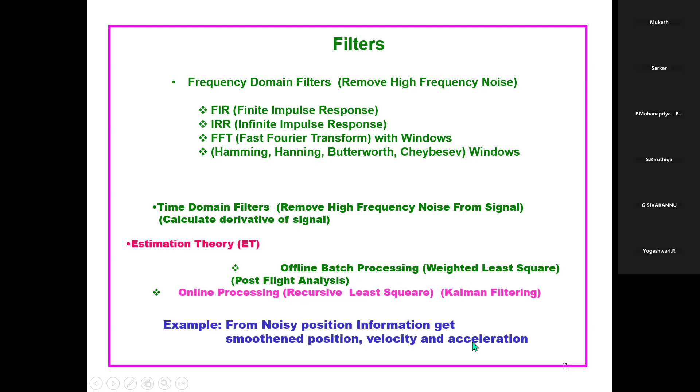And in a physical problem, you cannot avoid differentiation. Why? From the position you differentiate to go to velocity, and from velocity you differentiate to go to acceleration. You have to do it because these are kinematics, and in any missile case, when it is going to hit the target, some guidance law needs position and velocity. And integration is the opposite process. If you keep on integrating, this noise will not be there. But the initial condition of the integration is very difficult to know, so that itself creates a bias. So both ways you are having a problem.

Today I can tell you one thing: if the signal did not have any noise, control and guidance engineers, particularly signal processing people, would have been jobless, and this technique would have never come. So differentiation in the presence of noise is very terrible.

And from noisy position, how to get the velocity? This is called the estimation problem. The signal is there with the noise, and from there you calculate the derivative or second derivative. And for derivative information, you don't need anything more than acceleration. That is done by using so-called Kalman filtering with a recursive least square. So I think I have given the importance of Kalman filtering and where it is used.

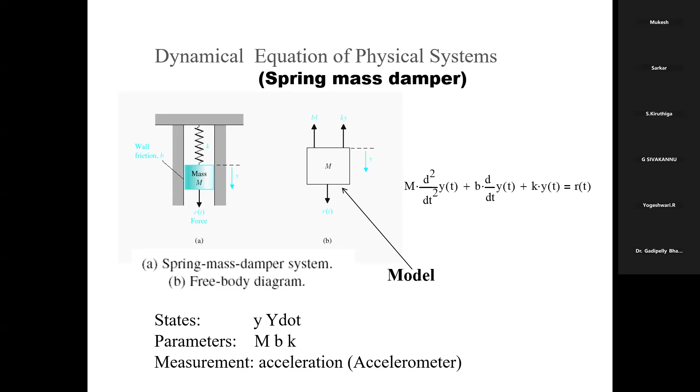And I think within my knowledge I have clearly told you. Now anybody having any question can ask me either now or later. Choice is yours.

So no way can you replace Kalman filtering as long as you are going to get the derivative of that signal. And the derivative of the signal is very important. Based on that, in kinematics, we generate the guidance command, and that guidance command is followed by the autopilot or controller.

So, I am going to talk about the history of estimation theory. These are all available in one book, Mohinder Grewal's book called Kalman Filtering. All the things are available there. I have shared that book with Mukesh. You can always take it and enrich your knowledge.

The first application of estimation theory was to track the planet Ceres, by Piazzi, an Italian astronomer, which he missed in January, and after observing continuously for 41 days in 1802, he could track back the planet based on estimation by Gauss. He is the greatest contributor in this estimation theory, and today everything you think of depends on the least squares technique he developed. Today, whatever we call optimal control, neural network.

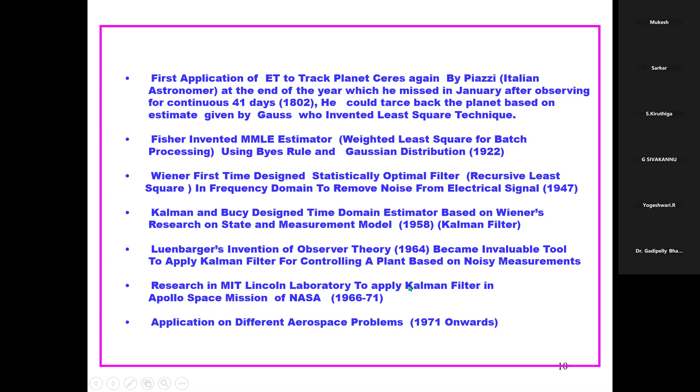So researchers in the MIT Lincoln Laboratory applied Kalman filtering in the guidance loop of the Apollo space mission, 66 to 71. It was successful. After that, computers also became more popular, from the time Charles Babbage invented the computer, and from 1971 onward the IBM 370 and all those things became available, and people started applying it in computers, and Kalman filtering has been a workhorse since then to today.

And application of the Kalman filter in the missile system: estimation of the sensor bias. That means in a sensor there will always be some initial bias. It's a physical problem. Nobody can help it. You have to bear with it. And trajectory from the EOTS and radar data, because when you do the integration, initially there will be some initial value. That is random, so no way you can find it out. And aerodynamic coefficients from the flight data. So these are all offline applications.

For that, people have used the extended Kalman filter for the forward pass, and then the Bryson-Frazier smoother offline in the reverse pass, and it is a recursive data processing algorithm and least square. I am not going to talk about the offline application, that is a different subject altogether.

So I am going to talk about the online only, because online is much more difficult, and offline, once you put this smoother, then it becomes very good. So now, I am just giving a little bit of implication. How come it becomes so important?

If you design a missile configuration, simulation study, then flight test, based on the flight data analysis you try to get the aero coefficients estimated, and that becomes very important for the control design. That becomes input to the control design, and control gains and all these things are re-evaluated and tuned to the actual system in the subsequent iteration.

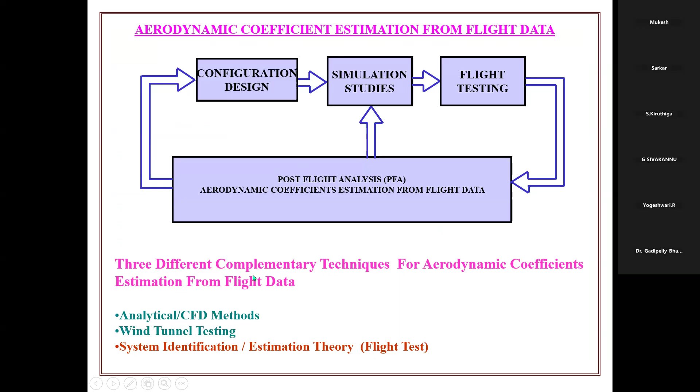So from the flight test, you get the aero coefficients; analytical and wind tunnel are also available. So this gives a third one, a complementary technique by which you try to correct the aerodynamic database after the first missile flight.

Then online applications: I am talking about the forward pass of Kalman filtering only. The radar is there. From there you try to estimate the states, meaning position, velocity, acceleration, and you uplink it to the missile onboard computer, and based on that they do the guidance calculation. Guidance means it will try to evaluate which path it will go, and after that the signal is taken by the control, and control tries to follow that path. Basically it is a tracking problem or regulator problem.

So state estimation from the sonar data for underwater application. Sonar is nothing but equivalent to seeker or radar for underwater application. And one more thing is there in the missile system, that is called seeker. Radar gives the position of the target and seeker gives the relative position of the missile and target. So if the radar is kept on the ground, the radar has to give the uplink command to the missile.

And if it is seeker, it is totally autonomous, and you don't need any third party like radar from Earth to give it through the uplink. This fellow will be in the autonomous mode, and it will directly hit the target. So that's why seeker has become very popular, and of course, seeker is very costly also.

So thinking about cost effectiveness, the Air Force or our users always prefer this: for some time you use radar, but when the missile comes close to the target, you switch over to seeker so that it will be in the autonomous mode and it will hit the target. This is in the guidance application.

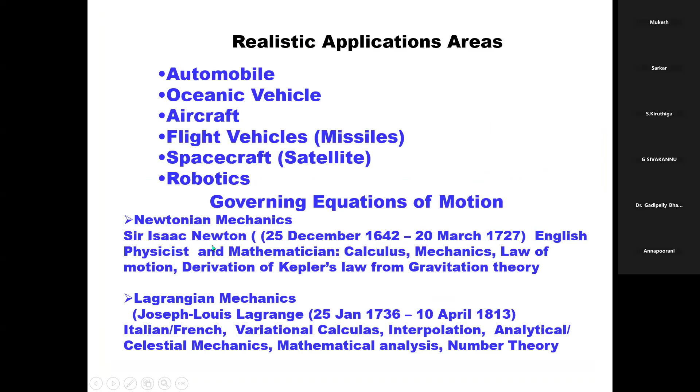Pioneering contribution in estimation theory. What are the areas? Automobile, oceanic vehicle, aircraft, missile, satellite, and of course robotics, and chemical engineering plants also, and governing equations of motion, Newtonian mechanics and Lagrangian mechanics. Okay, who are the great contributors on this? Friedrich Gauss, least squares, recursive least squares.

Then Norbert Wiener, MIT professor, invented the Wiener filter. That is in the frequency domain. Then Kalman, 1930 to 2016, applied it in the time domain with the state space method, and he is the third contributor. And of course, other contributors are there. Their impact is not so much, so nobody can replace the Kalman filter today.

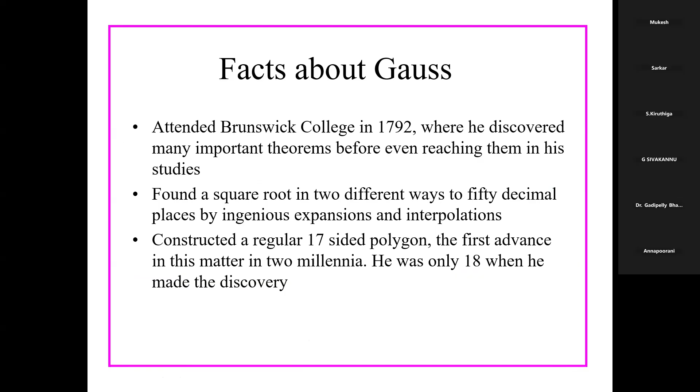He was only 18 when he constructed a regular 17-sided polygon, the first advance in the matter in 2 millennia. Gauss was a mathematical genius. His importance was in number theory, algebra, analysis, geometry, probability, and theory of errors. And he worked on astronomy, celestial mechanics, surveying, geodesy. The areas covered range from astronomy to civil engineering, electromagnetism, mechanics, optics, and actuarial science.

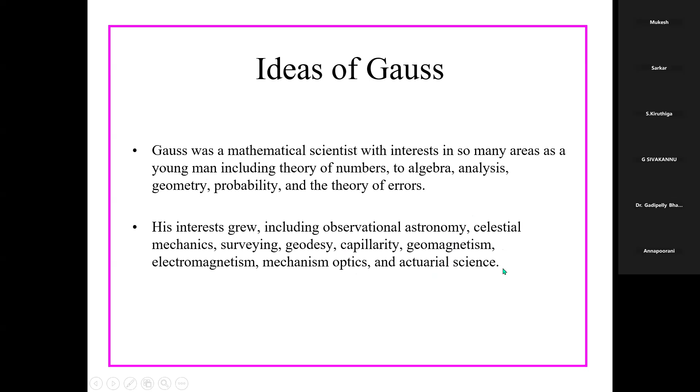And he was a very introverted person, never used to talk to anybody. And Adrien-Marie Legendre in 1805 published a paper on least squares, but he did not give any proof. Gauss gave a formal proof, and I think we all know how least squares is done. We all study it in mathematics. So Gauss basically introduced that.

And these are all in the state space method. And I am going to give a proper definition of estimation theory, what basically it does. I have taken this from the slides of Professor Ghosh of IIT Kanpur. You are having a dynamical system, x dot is equal to f of x, u, theta. Standard equations I'm taking. It will be having the input, and output will be there.

In a control problem, what happens? You give the input and try to get the output and see how the output meets the requirement of the demanded output, whatever error will be there, with a minimum tracking error. But this estimation is something different. Input is there, and output also is there as a measurement. But from there, you have to calculate the state variables and parameters. So it is a totally inverse problem.

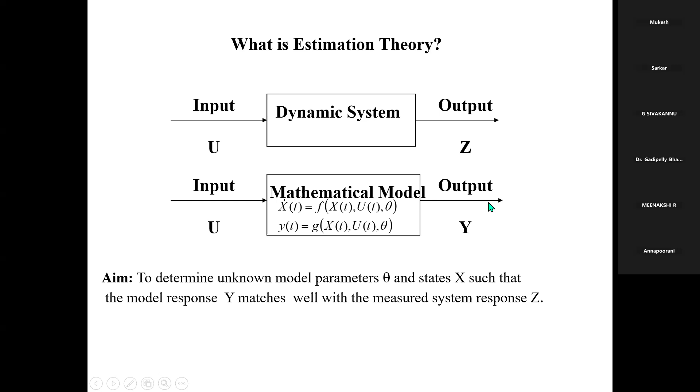So that output y actually matches with the measurement of the system, going in the mean path through the noise. Those plots I'll show you later. So input is there, state equations are there, there will be some process noise. Then measurement will be there, the sensor senses it, a sensor model will be there, and noise also will be there. In the sensor model there will be some noise, and output will be there. So in the input some noise is there, and in the output also some noise is there.

What is the noise in the input? I'll give a very good example. When you are flying in an aircraft, during the cruise time, what happens? You must have seen so many times that it goes into turbulence, and some buffeting takes place, and you get a jerk. That is nothing but an input. It comes as an input, and in no mathematical sense will you be in a position to model it exactly. There will be some approximation.

So in the plant also, there will be some approximation. So some noise will be there in the input, something in the plant, and something in the measurement also. So in three places noise will be there, and the mathematical model cannot represent the realistic phenomena. As a result, some amount of noise and some imperfection will be there. That imperfection you have to compensate. That is called the process noise. I will come to that later. That is the crux of Kalman filtering.

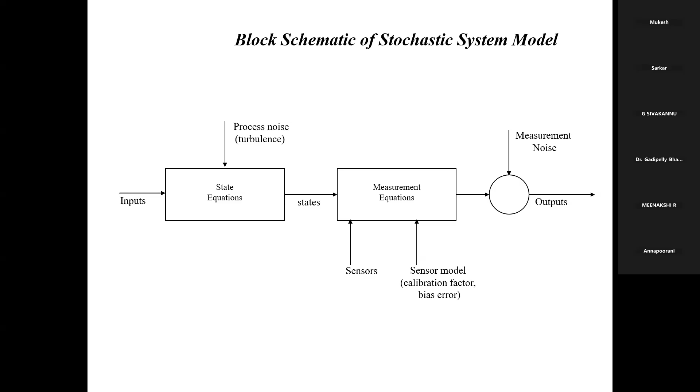It is equivalent to gain scheduling, whatever you do in control. Actually, Kalman filtering and control have very much similarity. There you do the gain tuning, here also you have to do it. But in Kalman filtering, the plant is basically in the time domain, and in control design, the plant is in the frequency domain through the transfer function. That is the difference, but all are the same.

And applications of that: target identification, missile and aircraft dynamics, gravitation field, stock market, process control. I forgot to tell you the first time, adaptive control, because based on the gain scheduling, you do the adaptive controlling. And structures, when they vibrate, how to remove the noise, then econometrics, the stock market, and system checkout, human psychological behavior. So many things the Kalman filter can be applied to. Apart from this, I know to some extent about the chemical plant. Of course, I have not worked on it, so I cannot talk about it.

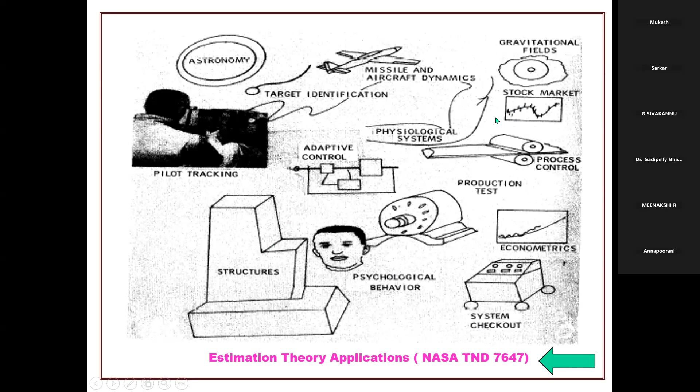Okay. So now let me talk about the Kalman filtering algorithm. I will talk in a very crude sense by giving an example. And the equations, if you go through them, automatically you will understand. But I want to cover the physics of the problem. See, I am taking one missile problem on which I have worked. This is the target, and this is my missile. Now, the mother aircraft is where the missile is launched.

So once you launch the missile, initially the distance will be around 100 kilometers. Up to some 80 kilometers, the aircraft will be having a radar. The radar will give you the information of the target, and based on that it will go using a radar filter inside. That is also a Kalman filter. Then, once you go somewhere close to the target, around some 20 kilometers range to go, the seeker dynamics will come. The seeker will be opened, and the seeker will keep on searching for the target. That may take not more than 20 seconds. Then all the control will go from the radar to the seeker, and the system becomes autonomous.

So when it happens, the mother aircraft will push off from the enemy, and once it is in the autonomous phase, it will go in and hit the target. So how many filters are there? One is the mid-course phase radar filter, and terminal phase is the seeker filter. Those two I am going to discuss.

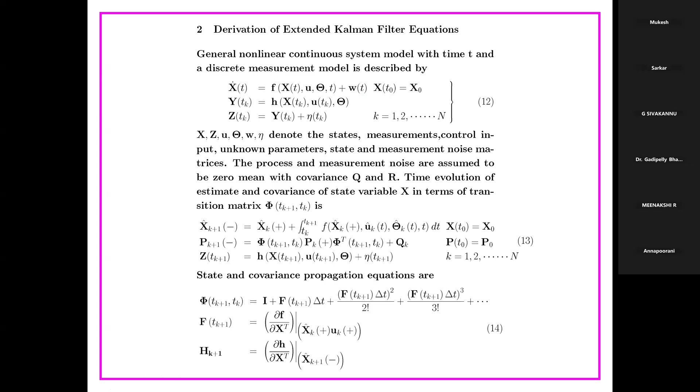Okay, I am giving you the equations. I'll give an example; that will be better. These are my state equations. They are all nonlinear equations. y is the output, and z is the measurement, meaning y plus eta. This is my noise, and the input will also have a noise, and I'll highlight the sources that give the noise. I am writing the Kalman gain, then propagation, then update.

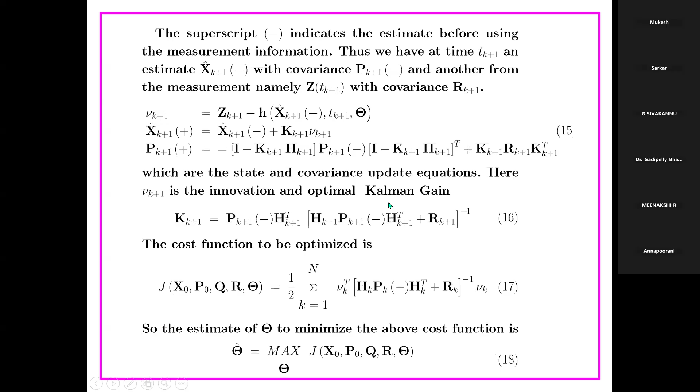So these are the equations of Kalman filtering, but these are all jargon. I will tell you the basic physics, and if I can convince you with the physics, then you will understand. This is basically a predictor-corrector algorithm. This is the prediction algorithm. That means a differential equation, so you solve the differential equation for one time step delta t.

Then after that, there is something called variance. Any statistical system will have a mean and variance. Variance in multiple dimensions is called the covariance. So the covariance also you propagate, and then you'll have the measurement. Based on that, you correct. There is something called the Kalman gain, and with that you estimate the state and the covariance. And this is the gain.

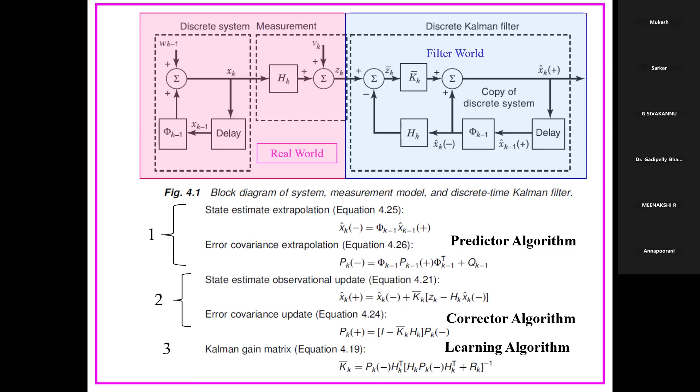Okay, so this is my real world, and this is my filter world. These are the equations. That's all. You have to just do the coding judiciously, and once you make a mistake and correct it, your basic fundamentals will be clear.

Now, let me give an example. I belong to Hyderabad, so I am giving an example of Hyderabad, from DRDL to Secunderabad, wherever the train goes. Like this, you can extrapolate between Trichy and Hyderabad. Say you are going by a train.

Once you start from the station, some element of error will be there initially. You cannot find it exactly. And from here you start. Over time, the error will keep on propagating. The next place from DRDL is Saidabad. You go to Saidabad, and some error has come, you see here.

Then, once you give the correct information with some amount of accuracy, it will update. That means with this knowledge, the position gets updated. So instead of coming exactly, it will be at a little bit different place. Then again from here, you go to one more place called Koti in Hyderabad.

Okay. So Koti, once you go, it will not be in a position to go exactly; some amount of error will be there, because sensors will be having the error. You can't help it. Okay. So then after that, you give one more update by another instrument, say by using radar. Radar is an instrument by which you generally give the update. Then again it will come here, and again it will go here.

Koti, there is a place called RTC crossroad. So there you update. Everywhere the loop comes means you are giving the external information. That is also noisy. But what will happen in the process of least square? It is basically recursive least square. So noise from both the elements will go. Okay. Then after that, you go to Secunderabad. And at Secunderabad also, again, you do an update. You get the information. Then after that, you go to the airport called Begumpet Airport.

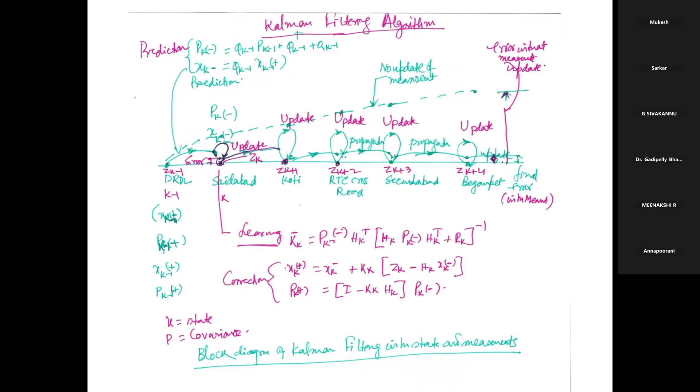Okay, so this is the block diagram of the Kalman filtering with state and measurement. This is the essence of the filtering, and I am not going to discuss the equations. Once you understand the physics, automatically equations will come with statistics knowledge. You can always go through the book and find out what is the meaning of mean and variance. And with that, you have to go with some amount of matrix algebra.

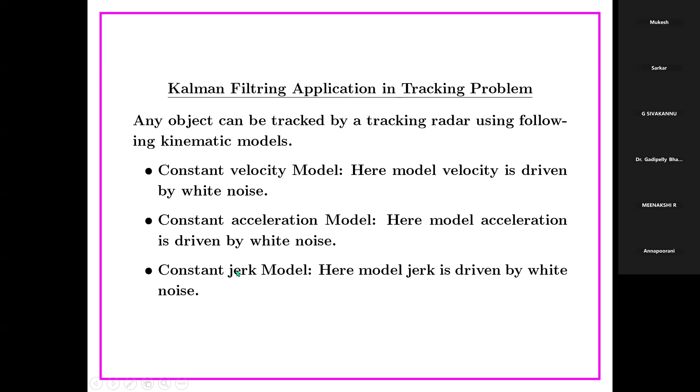Okay. So when I derived it first time and gave it, then over that I tried to make the improvement. I feel that if I write like this, audience will be in a position to understand. Because constant velocity means what? Velocity is constant. That means what? Kinematics: x1 dot, the position derivative, is equal to x2. Okay. And x2 dot is equal to 0. That means velocity is constant. X1 goes like this and x2 becomes constant.

So you try to calculate this by integration. X2 is equal to c1, x1 is equal to c1 t plus c2. What is this? This is nothing but S is equal to S naught plus U into T, whatever you have studied in mechanics. So the same thing we are writing, casting it in a different way and doing the integration. And now what is the error you are getting?

Because this is for a particular system where the velocity is constant. Velocity cannot be constant. So S is equal to S naught plus ut. Taylor series: f(x plus h) is equal to f(x) plus h into f dash x. It is the same as this plus higher order terms. And that is the approximation I'm going to do for a nonlinear system. Linear system is 100% correct, but nonlinear system, some difference is there. We have to compensate somehow. I will come to that.

So S is equal to S naught plus ut. Come on, let us write down the equation with the disturbance. That means in a stochastic form. See, x1 dot is equal to x2 and x2 dot will be 0; instead some noise will be there. So let us write down in the state space form. It comes like this: Ax plus Bu plus Gw, and y is equal to x1. So measurement is this: x dot is Ax plus Bu, y is equal to Cx. The standard form. Or here they are writing Hx plus eta. Here also some noise is there. So it will be written in this form.

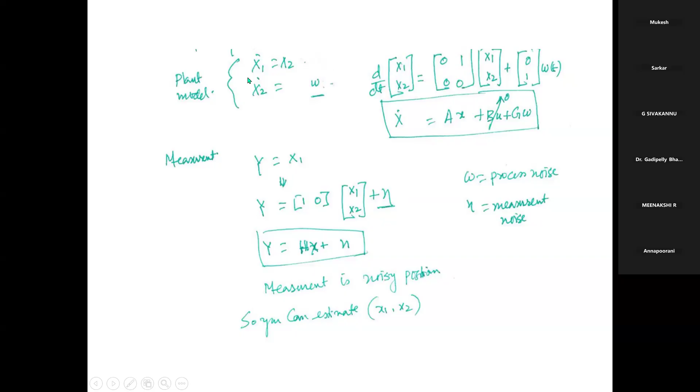So with this form, you have to design a Kalman filter, constant velocity. I have written this, and whatever amount of error comes will become like this. And you have to calculate the variance. With a little bit of algebra, what is called the process noise matrix will come like this. I have written here, and anybody interested can go through. It will be there in the journal paper of Singer or some book. Candy also, it will be there.

Okay. So now constant acceleration. This was invented by Singer, AES 1974. Position, velocity, acceleration. Position to velocity, velocity to acceleration, and acceleration is a constant. So let us take the kinematic model. x1 dot is equal to x2, x2 dot equal to x3, x3 dot equal to 0. So now let me compute by integration what will come. S is equal to S naught plus ut plus half into at square. This is what you study in your 12th standard. And now if I want to model it, you put some noise. Here is the noise in the state model, and in the measurement model also there is a noise. So these are standard state space form.

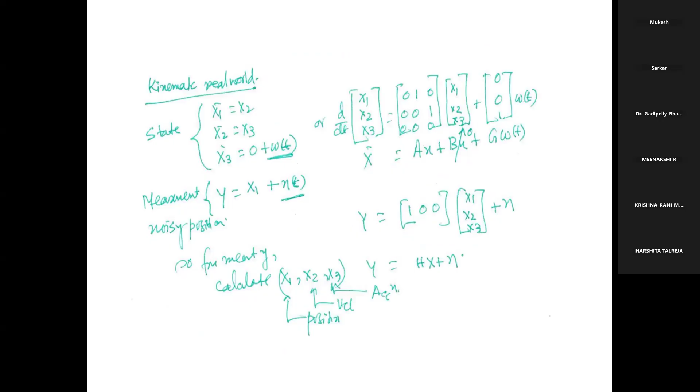And for this also, if you try to calculate the variance of that noise, this will be like this. This I have taken from Singer's book, but after that Bar-Shalom also has written. So those books I have given you, and this is my tuning parameter in Kalman filter. This value you have to put, and according to this you have to see. And once the output of the filter and your measurement match in a least square sense, that means my tuning is correct.

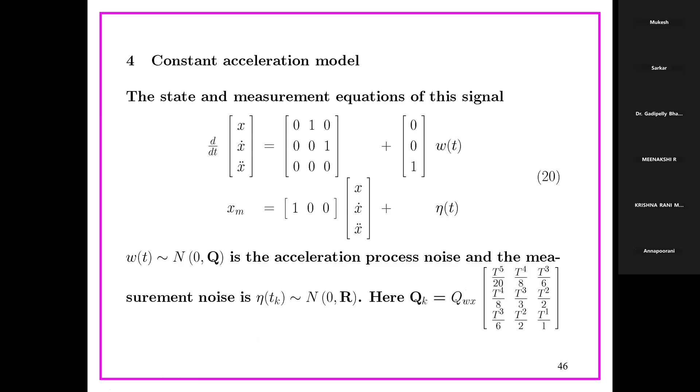Now, it is a paper by Professor Mahapatra and Mehrotra, one IISc faculty and one student. This is the constant jerk. Position, velocity, acceleration, jerk. You take the kinematics, keep on integrating. What will happen? S is equal to S naught plus ut plus half into at square plus 1 by 6 into j into t cube. You know this equation is there in H.C. Verma's book in intermediate physics. So ultimately this comes, and there is no need of taking any model more than that. You are going to just increase the models and it is not going to give any effective improvement. So this is the place people have stopped till today.

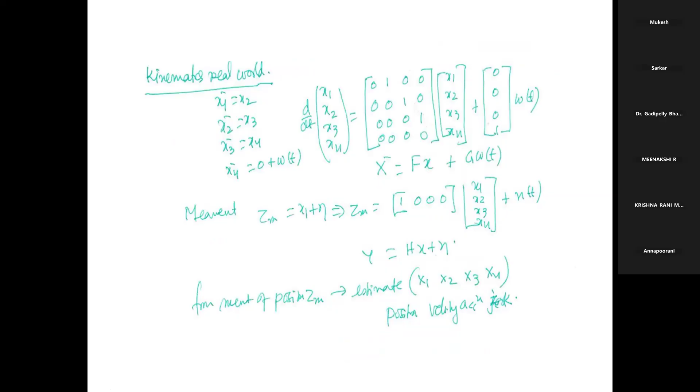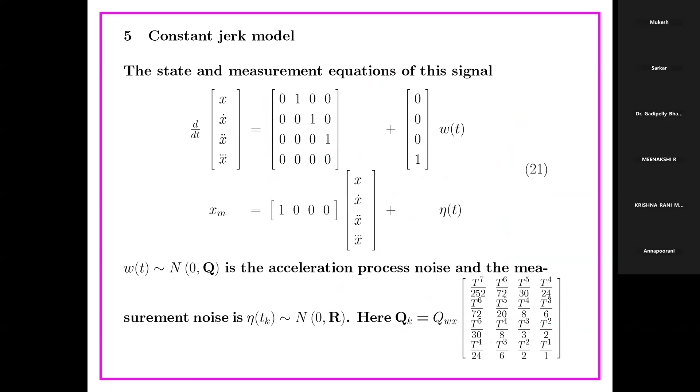So f(x plus h) is equal to, you just keep on expanding, then after that the noisy term comes. So this is basically the kinematics model and measurement model. And Q is this. So whatever was there in the constant velocity, the same way you can calculate the measurement noise covariance and process noise covariance of this. You put this value and keep on tuning manually, just like you do the PID controller manual tuning. People have done automatic, but in my experience, manual tuning is the best.

So I have told about constant velocity, constant acceleration, and constant jerk, the near perfect models in literature. These are my models, but a model cannot mimic the reality in the best possible way. Impossible. So you have to use that compensating term called Q, by proper selection of P naught, the initial covariance, Q and R. R is the measurement noise covariance.

Looking at the measurement signal, if you take the peak to peak variation and divide by 6, that means 3 sigma this way and that way, then you make it whole square, and that becomes my R. And Bar-Shalom had proposed a model called the NIS cost function. If you put the value of Q properly and calculate this matrix, and it becomes the number of channels, then your tuning is correct.

And you won't believe it, once you take the simulated data, it will come exactly. Suppose my 3 measurements are there, it will come to exactly 3. But with flight data, it will not come to 3, it will be around 2.8 or 3.1, and you have to bear with it. Because in flight data, Gaussian noise is not there; some other correlated noise will be there. But the filter works properly. Whatever error comes from improper modeling is compensated by the Q matrix. By proper modeling, you can do your job nicely.

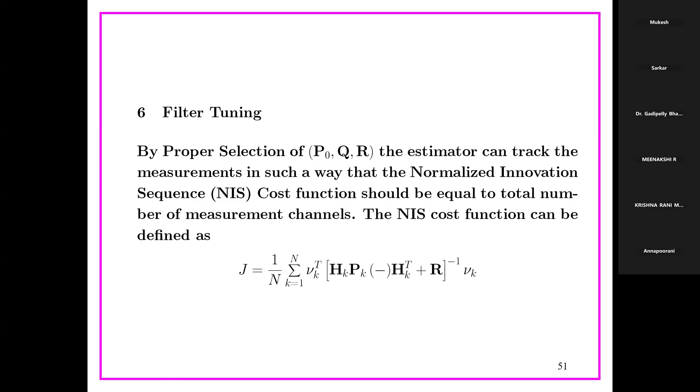And in today's world, there is nothing better than this available. So that's what I mean to say. For so many years, the Kalman filter is working properly. After that, some other filters have come, but nobody is in a position to replace the robustness of Kalman filtering.

So let me take an example. I have given how to choose R, Q and all, and I don't have much time. I have to finish up by 7:15 as Mukesh has told. So I am going to talk about the radar filter, open loop design. Once you do the open loop design in MATLAB, you have to put it in the closed loop with the 6 degrees of freedom model. The papers are there. I have just given them. You can just go through.

We use MATLAB basically because it is easy to implement, particularly for an Akash type of system, where the signal comes from the aircraft here to the receiver, and the transmitter transmits to the missile for command guidance. So this is how it works. And exactly the same thing, radar is there. With that you use an observer and give the input to the guidance signal, which gives the commanded acceleration, and the acceleration will be tracked. So it is basically a state feedback system to the guidance law.

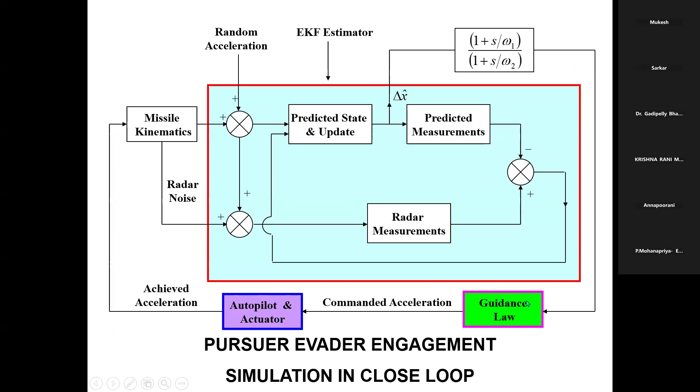And these are the most important papers in this area over the years. The measurement data will be there at 100 millisecond update, and the target can go up to 6 to 8G. So it becomes a nonlinear filter, and you have to use the extended Kalman filter. For filter tuning, by optimizing the normalized innovation sequence you can get Q, and you can use GA also. The papers have given it, but I'll tell you from my experience, manual tuning is the best. Once you do the work for some time, you get a rule of thumb and will be in a position to do it.

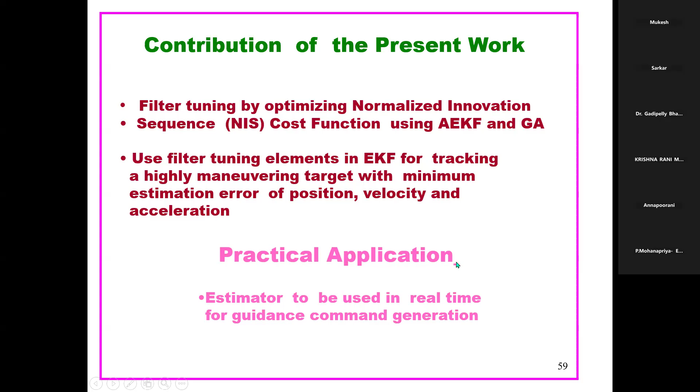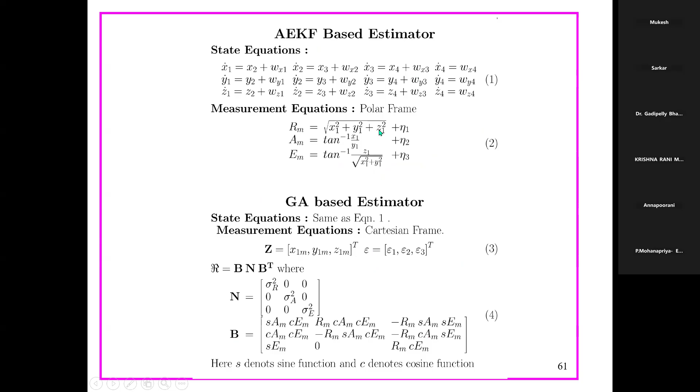The practical application: the estimates are used in real time for guidance command generation. This is my radar, and this is the target. This is my range to the target, and the target azimuth and elevation. So I have taken state equations in all the directions: x direction 4, y direction 4, z direction 4, and range, azimuth, elevation are functions of x, y, z. So this is basically from the kinematics.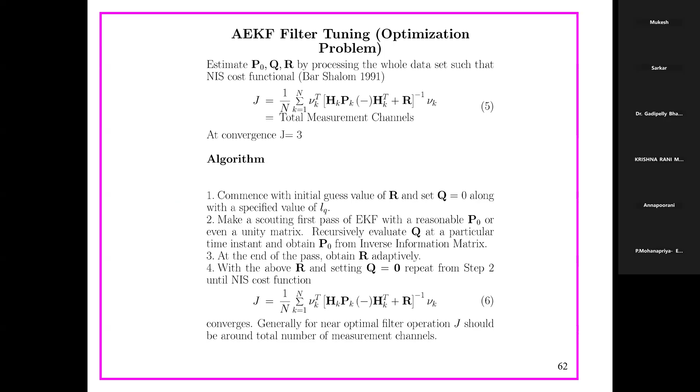So let me design the filter, where J is equal to 1 by n into nu transpose (HPH transpose plus R) inverse nu. Here I have done it in an algorithmic way because, frankly speaking, my PhD guide is very particular about the algorithmic method. But after that, I have seen myself that instead of algorithmic, hand tuning is the best. And many people have agreed with me that you don't have to do the algorithmic way of Q tuning. So now I'm showing you the simulation results.

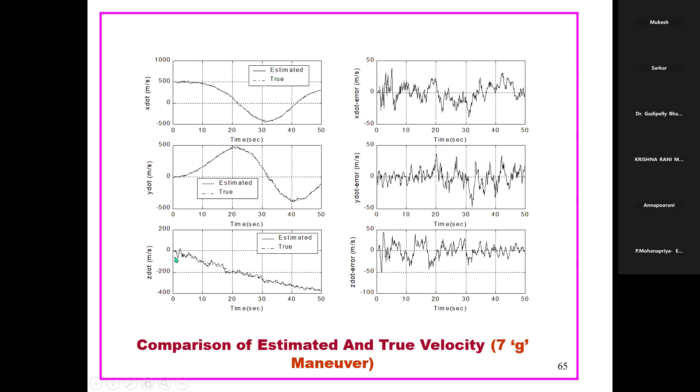So you know what happened: X dot I have given, and this much amount of error in the estimator and true X dot, Y dot, Z dot for a 7G maneuver. Acceleration also you can compute, but generally in our guidance till now we are not in a position to do anything better with acceleration. So till now in the missile complex we are dropping the acceleration. We are not using the acceleration term.

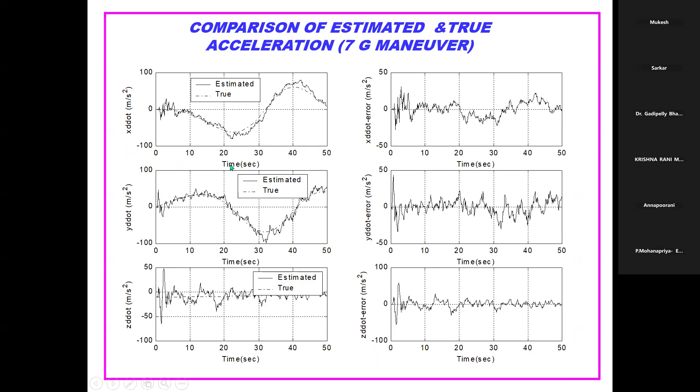And after that you pass the innovation through a low pass filter, and that oscillation becomes less. Without the low pass filter it is noisy; you put the low pass filter, this becomes quite smooth. And once the signal becomes smooth, my command also becomes smooth. And when the latax command goes smooth, it does not tax the actuator, because if it goes as noise, the actuator will consume a lot of power. It is always better to give a smooth signal to the actuator. So this is what I have done for the radar filter.

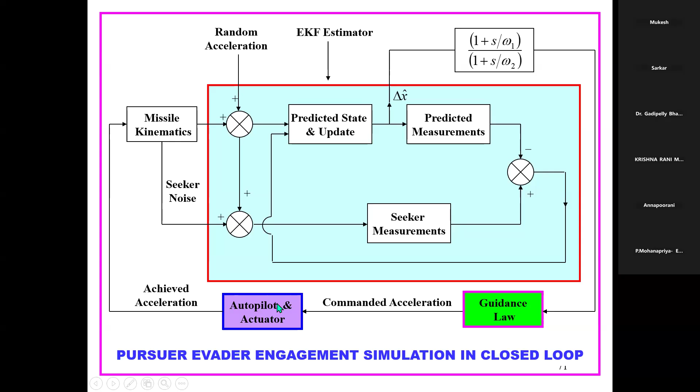Similarly for the seeker, seeker filter design, which I have to finish by 7:15. Exactly in the same way. This is my seeker noise and seeker data. Then it comes to my observer. Its output goes to the guidance law, then to the commanded acceleration in the same way. So for the seeker, what measurements are available? Schematic diagram of the seeker: this is the missile and this is the target. It always gives you the relative range between missile and target.

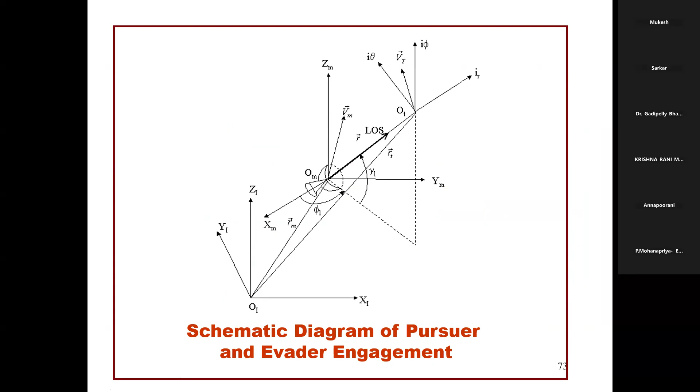In radar, what did it give? It gave the absolute range of the target position, it goes to the uplink and you have to subtract, and based on that you generate the guidance command. But the seeker is kept in the missile. The missile keeps rotating, so this also keeps rotating. It has to be kept in a gimbal so that it is in a fixed position. So a lot of frames are there and frame conversion has to take place. This is a part of kinematics and I need not explain. If somebody works in robotics, there kinematics is very important, and it is very similar to this.

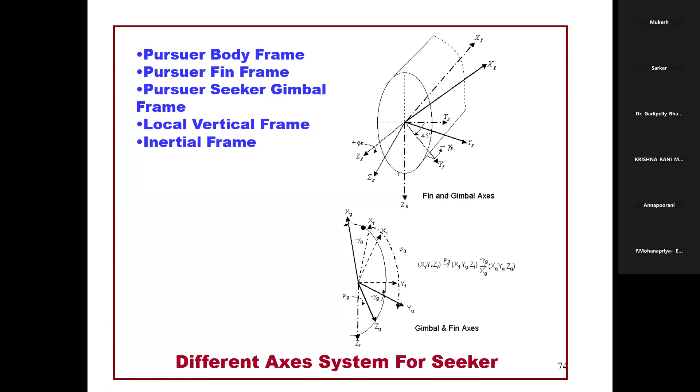So the problem definition: my measurement data are relative range rate and the gimbal angles, meaning the angle where it is kept. It keeps rotating, and gimbal angle rates are the seeker measurements. And I have to get the relative position, velocity and acceleration. What are the constraints? Data is at 10 millisecond intervals. Data is very noisy and it cannot be treated as Gaussian noise. It has glint noise and thermal noise. Sometimes data will come or not come, called eclipsing. There is aperiodic data loss in LOS rate during eclipsing.

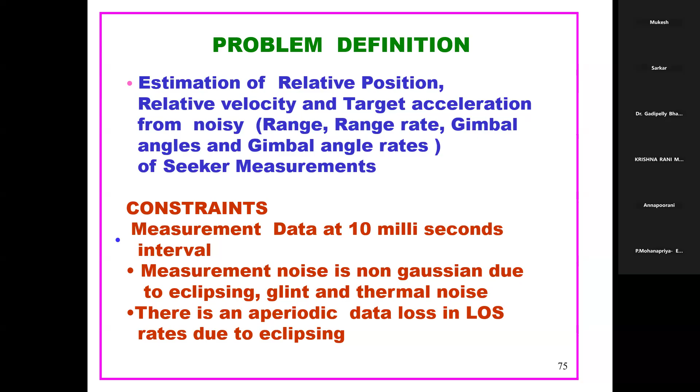So these are the constraints, and using a standard Kalman filter we got reasonably good tracking. Once you do it in 6D and look at the miss distance, the parameter for how much distance remains at the end, that becomes quite good. So even with non-Gaussian noise, we are in a position to get good results. And I am going to show how the seeker works, because from the seeker also you get some noise from the track loop.

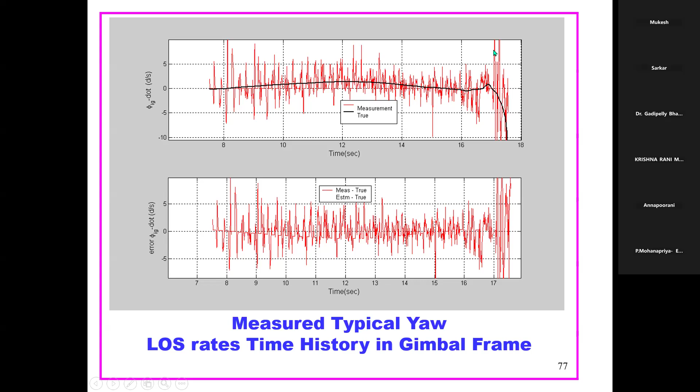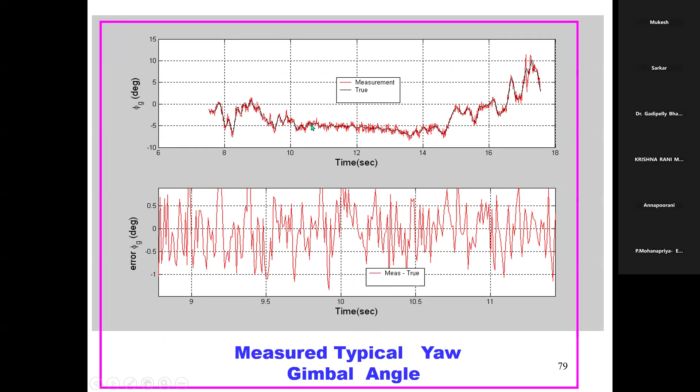Now you see, this is my true measurement and this is my noisy measurement of the gimbal angles. Definitely it is not Gaussian. Towards the end it becomes very big because of the glint error. And measured and true, these are my LOS rates: this is the true and this is the noisy signal. Gimbal angle also true and noisy. And R dot, the range rate, is more or less Gaussian. Sometimes LOS rate is not available during the eclipsing zone, and in the non-eclipsing zone it is available. So that is variable; sometimes it works and sometimes it does not. That is the LOS rates.

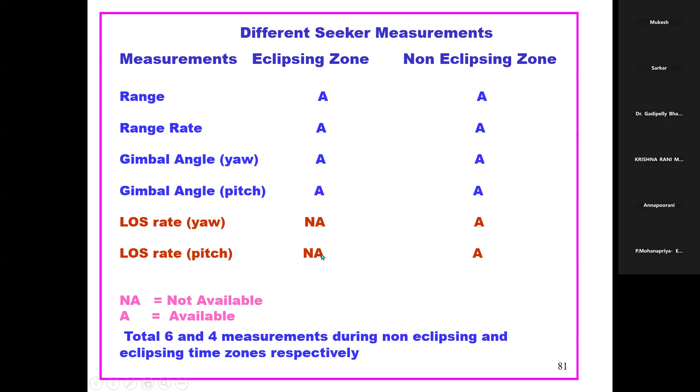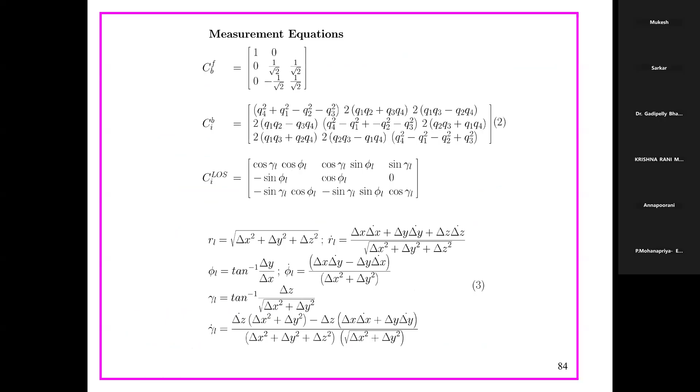So the Kalman filter formulation: we have taken the state equations there. Here is the relative state equation, and this is my control input. And the measurements, I am giving some algebra, but they are nothing but the transformation matrix, and that you learn automatically. So you need not go into details. So I am going to give you the results.

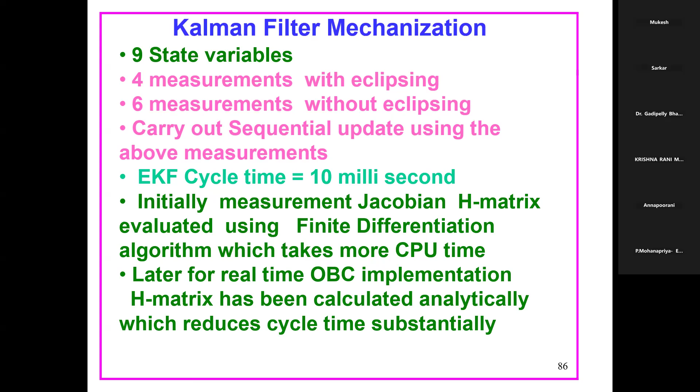All range data will come, and they will come with noise. So 4 measurements and 6 measurements like this. At a 10 millisecond interval it will do the job. So you do a nonlinear transformation. You go from the LOS frame to the body frame, fin frame, and inertial frame, and all the transformations you have to do. They are nothing but the mechanics part. Okay, I have given the value of the PQR.

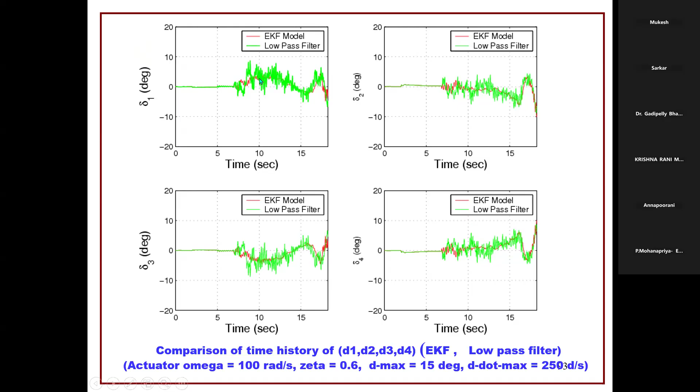And then, the fins from the control: the red thing is basically what we got with the EKF model. And if we put a low pass filter, the control deflection will be like this. This goes into the actuator. If it goes like this, the actuator will drain the battery in no time. But when the red one goes, it is quite smooth. That's what we want. Otherwise you need a very heavy duty actuator because the bandwidth becomes more. Here, a 20 hertz to 30 hertz actuator will be good enough.

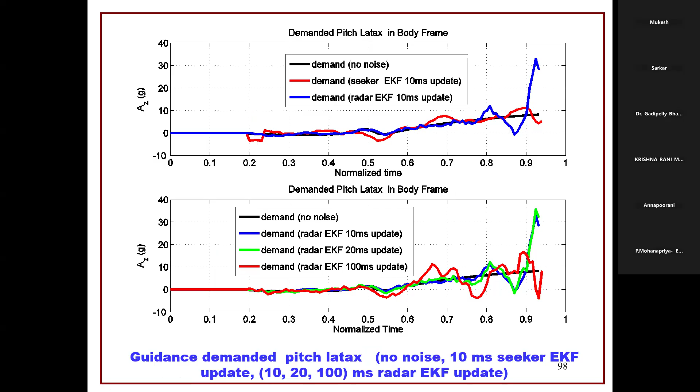But with radar, toward the end there is a distinct jump because my range becomes zero. That term becomes infinite, and it is difficult to calculate because of the singularity problem. But with the seeker this does not come, because it directly takes the difference of the angle. So the radar goes up, and here it does not go up. One typical trajectory I have shown. This is going to hit the target.

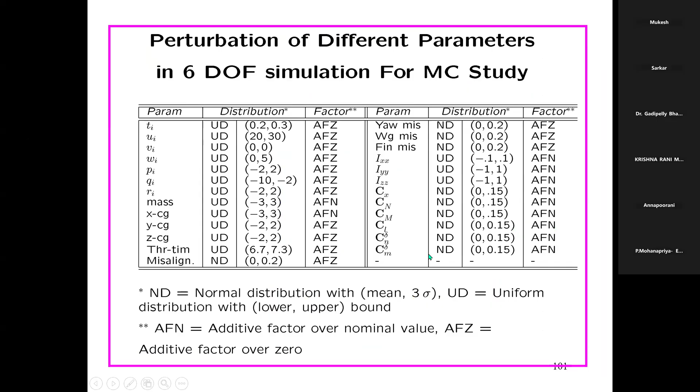Ultimately, you have to do Monte Carlo simulation because once the noise comes, uncertainty becomes more. So all the parameters, initial conditions, aero derivatives and all those things, you have to use a normal distribution and do a Monte Carlo simulation. You do 500, 700, or 1000 Monte Carlo runs. Nowadays computers have become very fast, so they even do 2000. And not a single one should go out of the bound. So that is the Q factor I have taken for radar as well as seeker.

So I see at the end what I want to say. Seeker is more preferable, but seeker is more costly. And radar will be much cheaper, but at the cost of what? Once enemy jams the radar site or enemy bombs the radar site, then the missile is totally blind. But whereas the seeker is there, the missile cannot be blind because the seeker is on board.

So everybody, even our users, they all want the seeker-based guidance, but not the radar-based guidance. But of course, our Akash missile is radar-based and Astra is seeker-based. Nowadays, missiles are all seeker-based because of this. Now I will show you some of the flight test results, because once an algorithm we develop is successfully flight tested, that means your algorithm works.

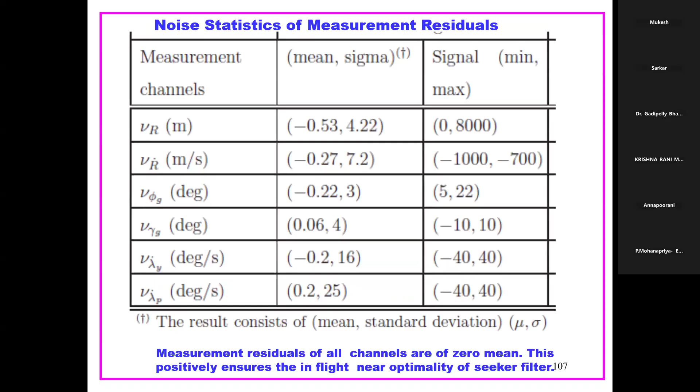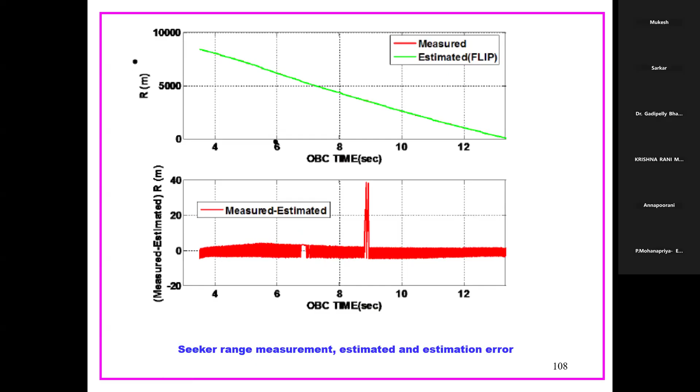See, measurement residuals and all, from there I have tried to calculate the R matrix. You see, this is my range and this is my estimate and measurement. If you find out the difference, it comes like this. So in terms of around 10 to 12 kilometers, here it comes within 0 and 30. And you see that it is not Gaussian; the mean will be very small, but it is not a Gaussian noise. But it works because when I've given the Q, model uncertainty is taken care of. That's why the Kalman filter is so popular.

Then the flight test I have done and measurement, and this is how it is matching. So this is my error. And gimbal angle also. Actually, in our simulation, the model was there, what the Russian people gave. In the flight, the error level has come down. That way we are happy. Flight performance is better. And there are the gimbal angles and LOS rate.

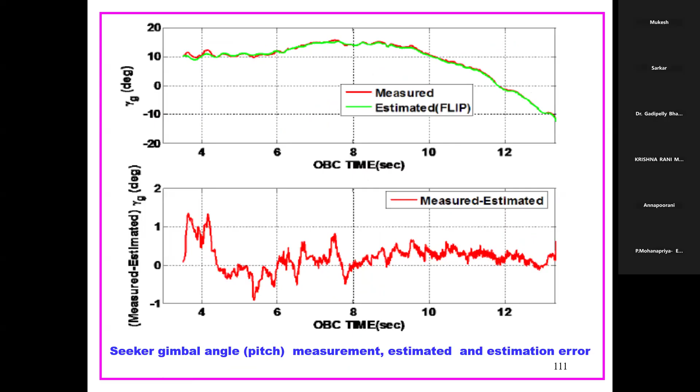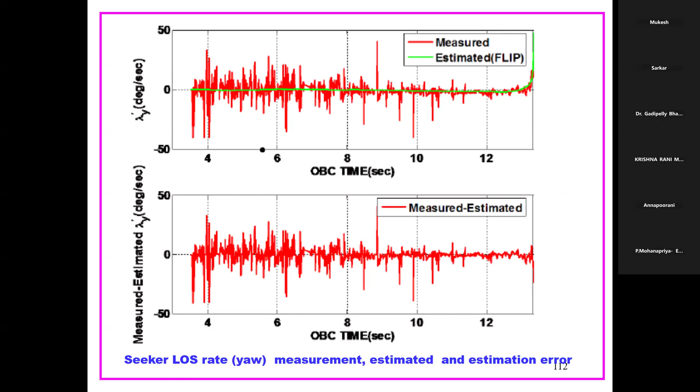Now you see the LOS rate, how nasty it was. Now nicely, smoothly it has been done after filtering. So this is the importance of filtering in missile dynamics. Otherwise, it will give more oscillation in guidance, and ultimately it will tax the actuator, drain the total power, and the mission will be jeopardized. So this is the ultimate thing I have shown.

So now I'm going to conclude. I think I'm within the time. Evolution of the estimation theory I have told from the beginning. MATLAB is a tool for real-time state estimation. Nowadays, people are doing it by Simulink. Of course, I don't know much of Simulink, so I have not used it. I use only MATLAB. Design the radar estimator by using MATLAB. Seeker estimator also using MATLAB.

Why use MATLAB? Because with matrix multiplication, you will not make any mistake. Second thing is that coding is very simple. But after you design, ultimately you have to go to the OBC in C code. That time you have to use the C code. So closed loop validation by radar and seeker estimator. Monte Carlo simulation for robustness of the system. Comparison of radar and seeker estimator. Then flight test validation. So these are the things in a nutshell I have covered.

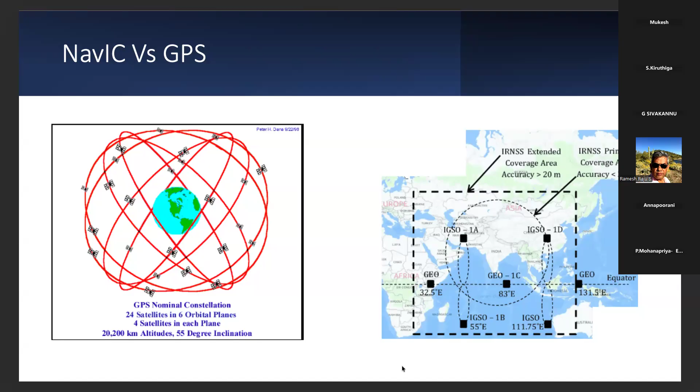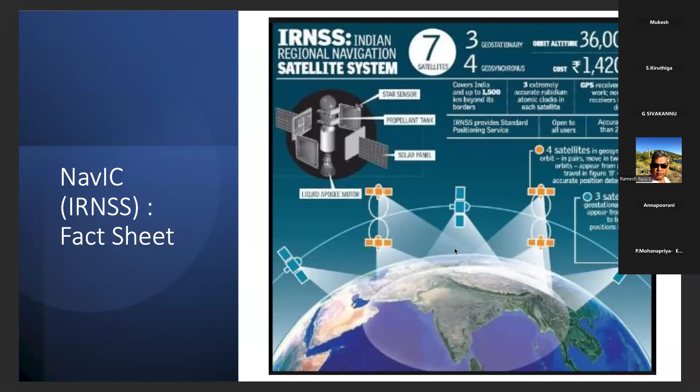Okay, there is a question: why does India need NAVIC? Why can't every system in India already use GPS in their mobiles and day-to-day activities? Why did India spend this much money and technology, and invest many scientists' time in developing NAVIC and making it operational?

Everyone knows about the 1999 war between India and Pakistan. During that time, Pakistan occupied much of the Kargil region, and they had the upper hand. All our equipment operating using GPS did not work, because the US government took a decision to switch off the GPS signal around that region, Kargil and Leh Ladakh, the Jammu and Kashmir area. So all GPS-enabled equipment was unusable, and India could not do anything with it.

So India fought a traditional war, and you know the result, we won it. But we had a lot of property and human loss during that time. So that's when India decided we should have our own NAVIC system, a regional navigation satellite system, which helps us during these critical scenarios where India could have done much better than what happened in 1999.

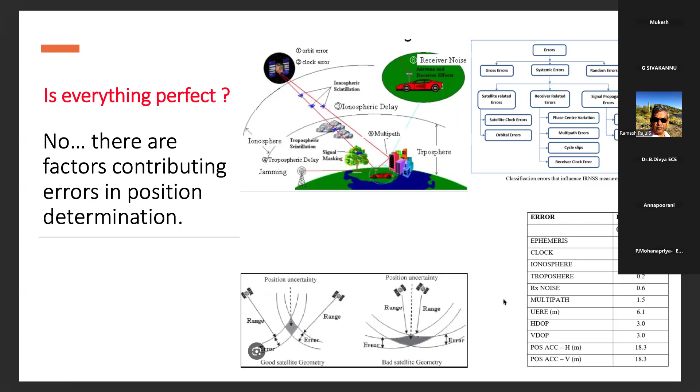So what is the solution then? There are many solutions, but the differential technique is one solution which is low cost and can be implemented by any institution. We have done it at Jain University, so universities and some organizations can do it with less cost involved. In this differential calculation, basically there will be 2 IRNSS stations. One is the reference station, another one is the mobile station.

The reference station is positioned at an accurately measured place where they know the XYZ, latitude, longitude, and altitude details of the position, and with that they can calculate the error, and that error can be applied to the nearby flying or mobile user, which corrects their position errors and improves the accuracies. So this is the high level concept of differential. Basically, we need two receivers, one on the mobile station, one on the reference station.

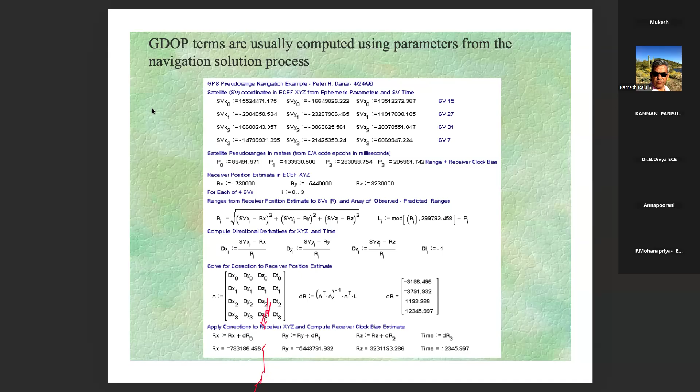Hope I gave you the right information. Before I get back to my presentation, let me give you some details about the stuff. Give me a minute. What generally we get in the details. In general, the receiver I used in the GPS for this experiment will get you this.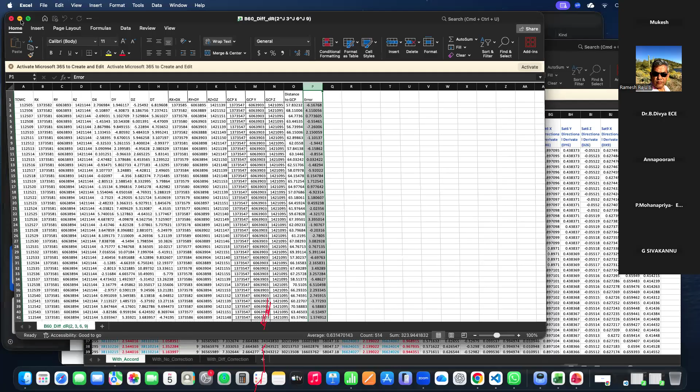For this application, I need to find out the distance between reference station and user. With the corrected positions, I know the error between measured distance and computed distance. I can show you in a different slide how the error looks. It typically ranges from less than a meter to 6 meters. That's the error measurement using the differential pseudo range technique I used to reduce the position errors and improve the accuracy. Okay. Let me go back to my presentation.

Yeah. So all my equations, the error Excel sheet data computation, and the Python code are talking about these three pseudo range flow charts which I mentioned in these two slides. This is the overall process. First, calculate the error at the reference station, apply the error in the mobile station, get these derivatives according to that navigation solution, and get the accurate error corrections on the mobile station. So that's the three-step process

how I calculated them. And as I mentioned earlier, the data link, how you will transmit the error between reference station to mobile station. Either you use the SBAS system, where we use a dedicated satellite to receive the error from the reference station and transmit the error to the mobile station. That is the SBAS system. There is a GBAS system as well. In the GBAS system, there will be a dedicated real-time data link using a VHF station. The data is transmitted in real time, the real-time position accuracies are computed at a mobile station, and the application we intended is made successful.

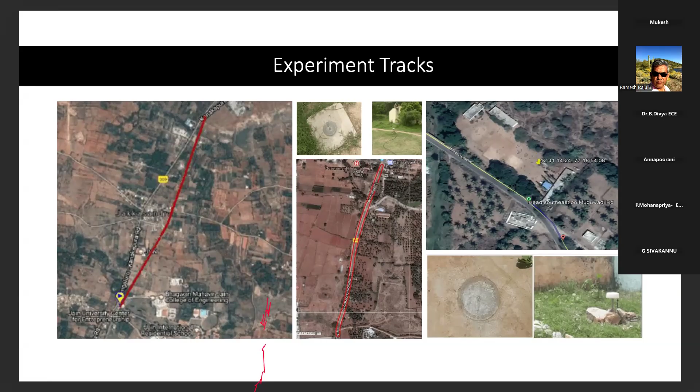So this is one typical exercise where we measured the distance between green and red, computed the error based on our pseudo range corrected position, compared it with the measured error, and so we know how much the pseudo range algorithm I used in my research improved. And this is on the Kungal station, and the one at the bottom right is the Halguru station ROI. And the other one is in Magadi.

Fortunately, at the Magadi GCE, this Survey of India position is inside the playground, in one corner. The orange icon in the chart is the reference station, and all the green ones are the various mobile stations.

This we used for another experiment, where A90, B90, B60, B120, C90 are different directions. 60, 90, 120 indicates the distance between the reference station and that position. So we measured this distance, got the position accuracies, and based on that calculated the distance. We compared both of them: how our position with differential pseudo range is able to measure compared to the measured one. So this is one of the experiments.

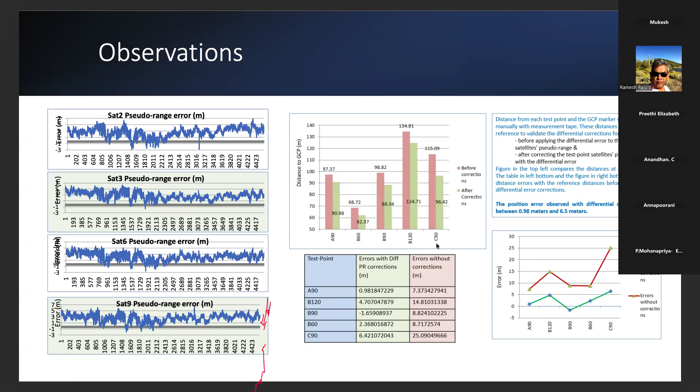And in another exercise, I did a comparison between GPS and NavIC. In GPS, there are many satellites available. We measured 15 various satellite combinations. The same thing we used in NavIC also. You can see the distance error measured using these satellite combinations. In GPS, three satellite combinations are very bad, and very few, I think three satellite combinations, gave us measurements less than a meter.

But if you notice, in IRNSS or NavIC at the same time, eight satellite combinations gave us a distance error less than a meter using the algorithm I developed, and two configurations are very bad, but even those are less than 40 or 50 meters. But compared to the GPS distance error computation table, the errors are too bad: 382, 343. The bad is much worse. So this is one comparison, and I presented one of my papers on this.

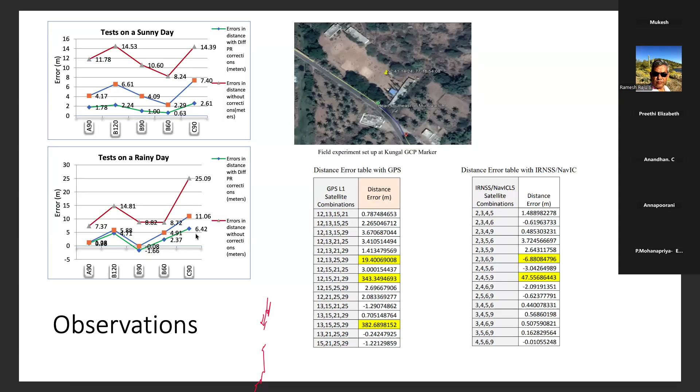And if you see the rainy day, I think the sunny day measurements are better compared to rainy day measurements. That indicates the rain has the precipitation, and that causes more range errors. That could be a reason. So this experiment provides all those details.

Okay, it is not end of my session. I think now 8:23. Mukesh, how much more time I have? Sir, another 5 minutes, sir. Oh, okay. I have accurately used my time what is given to me. Okay.